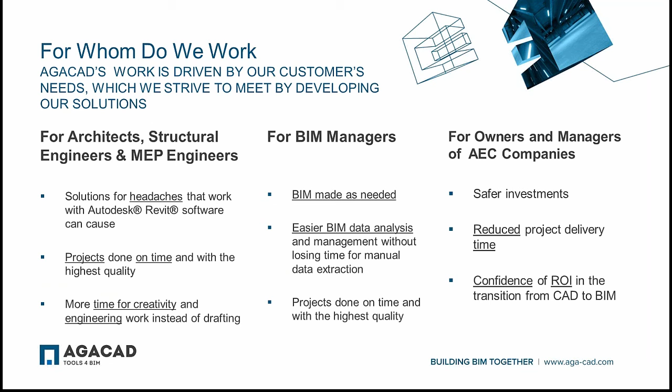These are the benefits we strive to deliver to our customers: less stress in daily work, easier BIM, satisfaction with return on investment. Our tools are not only for architects, structural engineers, and MEP engineers, but can also fit BIM managers, owners, and managers of AEC companies, and so on.

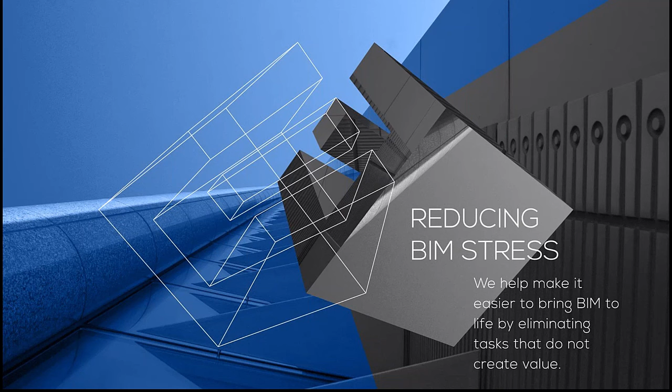Our promise to our customers is reducing BIM stress. We help to eliminate tasks that do not create value. The Tools for Revit extensions and BIM solutions significantly extend the capabilities of Revit, help to avoid many headaches, and save time. How do we save time?

We are creating additional software for Revit. Here you can find a bucket of our tools that can fit your needs. Going from the Cut Opening tool, which can create openings around line-based MEP objects where they meet walls, floors, roofs, ceilings, and structural elements, to other Tools for Revit add-ons, just for quicker, more intelligent work.

Going further with Smart Assemblies, Metal Framing, and Wood Framing, which are for structural engineers. We also have the Smart Browser for browsing your family libraries, for managing and making them smarter, not going into each family individually but creating batch changes for all families. We also have Sustainable Design, which can help you calculate energy things like heating power, cooling power, energy per month, and energy per year.

We also have BIM Tree Manager, one of our powerful solutions that can do a lot for managing your projects. And we have MEP engineering solutions like Smart Hangers for distribution of hangers and supports, R-Heating for creating heating systems, and Smart Diffusers for ventilation systems.

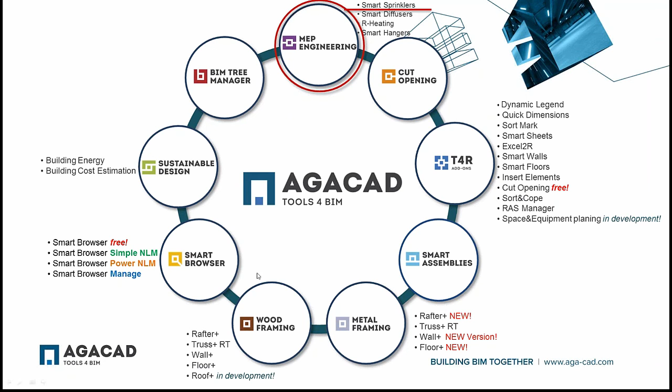Today we will speak about Smart Sprinklers, the solution that can distribute sprinkler heads into your project, connect them into one system using additional routing configurations, and size the pipes according to your needs. I don't want to speak more about this—I just want to go to my Revit and start showing what we can do with Smart Sprinklers.

At the very beginning, I want to mention that I'll try to show you everything on a new Revit project, because I want you to know that our Smart Sprinklers could work with any type of information that is in Revit. I don't need to prepare somehow for my presentation or my project—I just have to open my mechanical template and work on it.

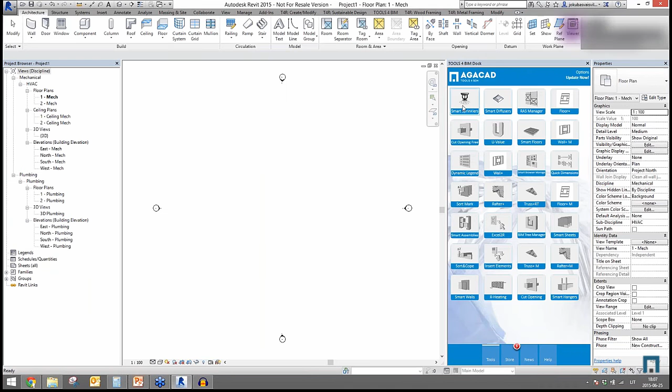So I just opened my mechanical template, and here you can see our smart sprinkler solution. This is a very powerful solution that has three different features: virtual grid, distribution configuration, and insertion of sprinklers. At the very beginning, I want to mention that our smart sprinklers could automatically distribute elements, specifically sprinkler heads.

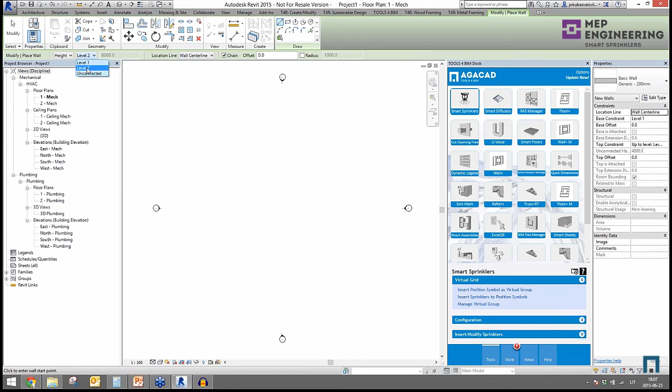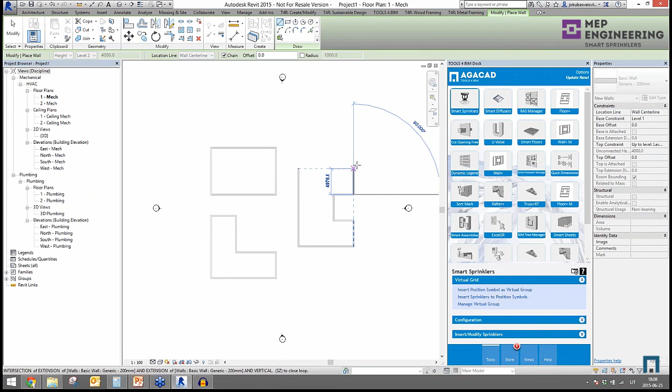For example, if we have such a space, or something like this, or even something like this, our smart sprinklers could handle that. Even if you have odd shapes inside your building, our smart sprinklers could help you distribute your sprinkler heads into the project.

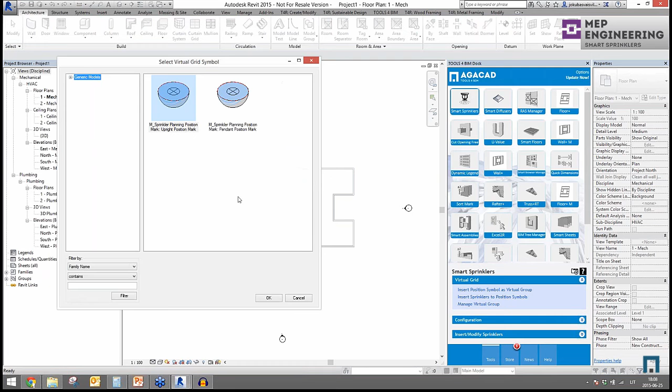At the very beginning, I will distribute my position symbols as a virtual group, just to create connectivity between a space and a sprinkler head. Here you can find sprinkler planning position marks for pendant and upright sprinklers. I will use the pendant position mark, for example, and as you can see, the X and Y axis occurs on my space.

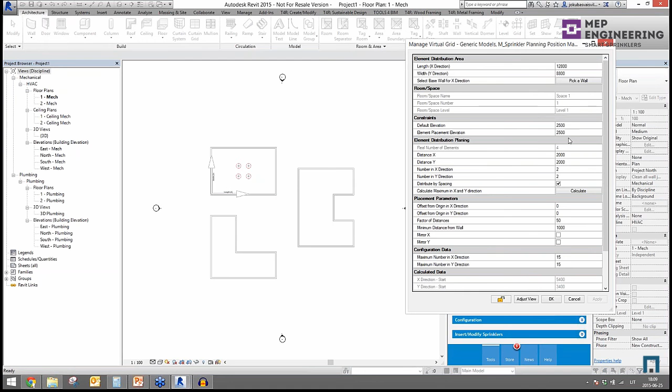Anytime I can change the X and Y axes to fit my needs, because according to these two arrows, you will be able to distribute your elements in your project. Here you have to define the elevation of placement of elements, as well as the distance between two elements.

So what does it mean? If I have sprinklers and I know that the coverage area of each sprinkler is 2 meters, for example, in my case, I can calculate that, and the solution automatically calculates the number of elements in the X direction and the Y direction.

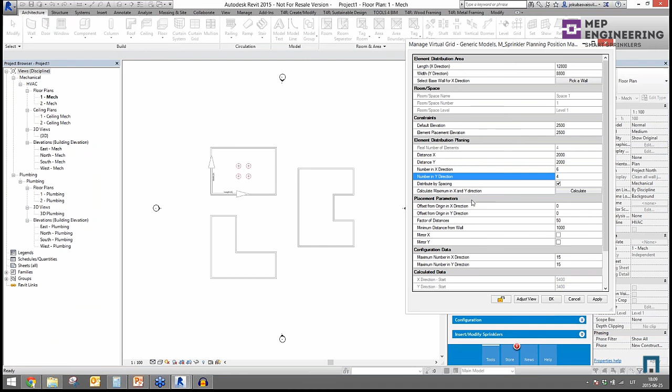After this, I can apply that to my project, and you will see how cool it is looking here.

As well, we have the offset functionalities. We have the functionality to set the minimum distance from the wall, for example, like this. I can set the maximum number of elements on X or Y directions like this, and they automatically just disappear.

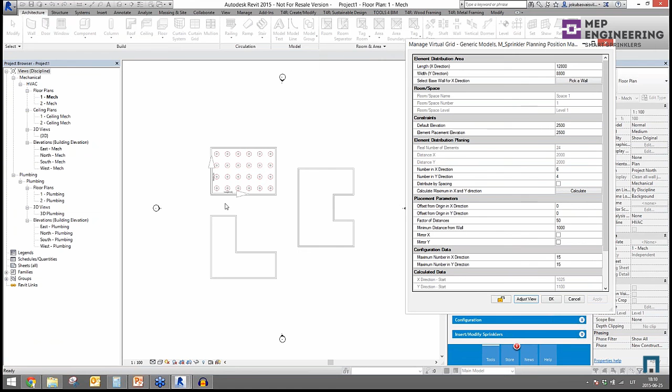Okay, I'm going back, so I'm applying. I can distribute sprinklers like this, so we will have a little bit bigger distances between the elements.

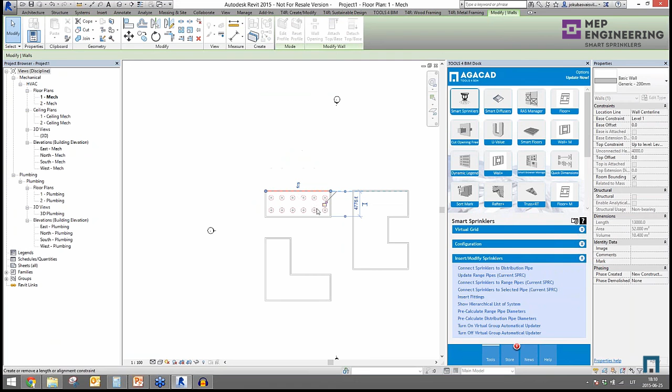But if I try to move my walls, for example, if the architect does some changes to our model, our sprinkler heads will move together. So you can see, if I'm changing the shape of my premise, of my space, the sprinkler heads automatically reduce or increase the distances between them.

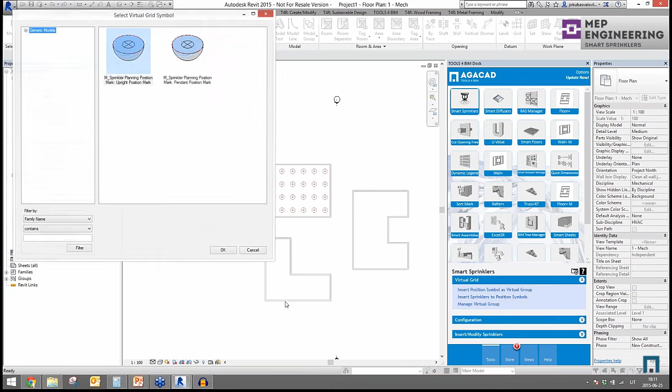So why did I do such spaces with such geometries? I just wanted to show you how our smart sprinklers could work with such geometries of spaces.

Out of the space. Oh, come on. Okay, let's check this one. Okay, yeah, that's what we need.

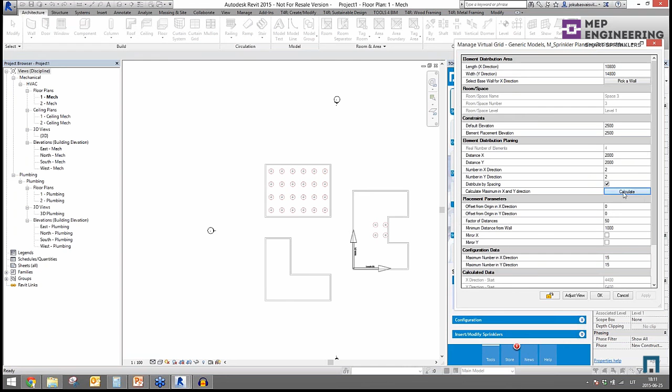So what I am doing is calculating the number of elements in the X and Y directions. I'm applying that, and you can see that the solution is reading the real area of a space, and it is distributing our families like this.

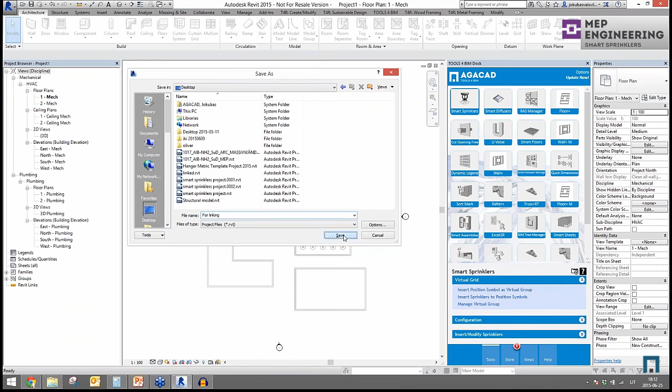So I want to mention that our smart sprinklers could work with linked files as well. For example, I will try to save this on a desktop as a file for linking, and I will turn that off, and open, for example, a new mechanical template.

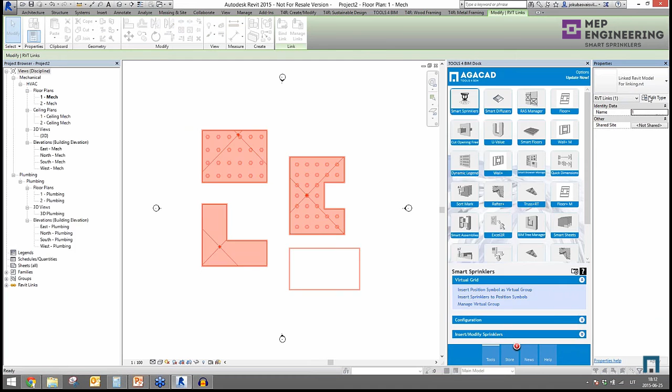And I will try to link the Revit file for linking. I'm opening it, and I have a link over there. So what I should do is create my links to be room bounding. I click OK, and I have to place a space over here.

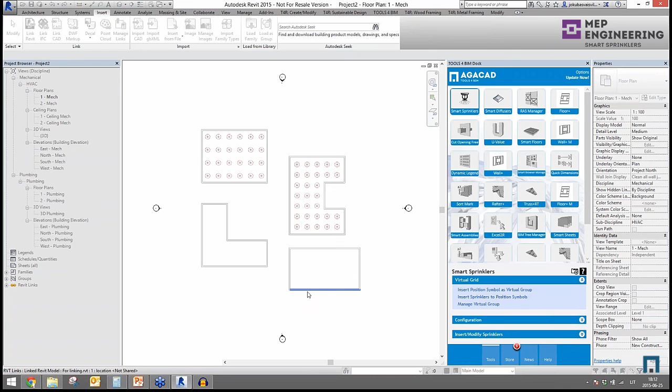Using smart sprinklers, I will take a space from that premise, and I will click the escape button. As well, I will take the x-axis, this wall as an x-axis, and again, now I'm able to do the distribution of my sprinkler heads.

So this is brilliant, really. Okay, so if I turn on the virtual group updater, and I will save this.

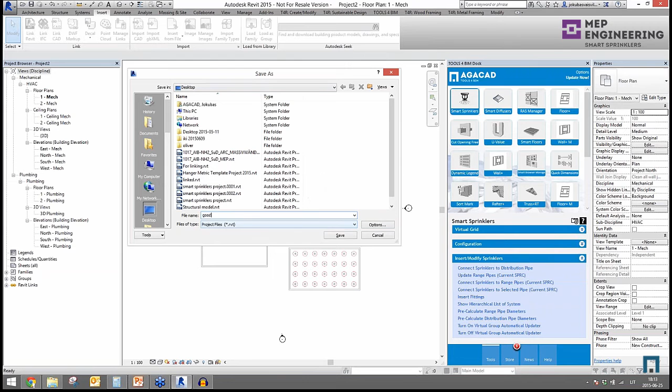Linked file. I'm saving it, and again, if the architect will do something with our space, with our boundaries, if I move it like this, I will save.

Oh okay, no save, get back to that project linked file. And you will see how automatically your sprinklers are updated after the update of the architectural model.

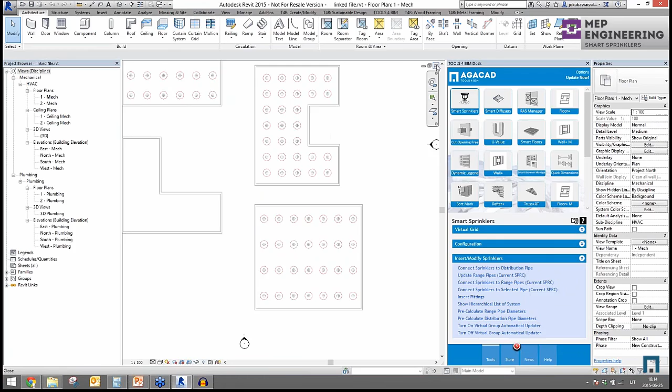So this is a really nice feature. I'm going back to the file that we have over here, and I will try to distribute these position symbols again over there. Just simply pendant sprinklers, calculate, apply, and that is all.

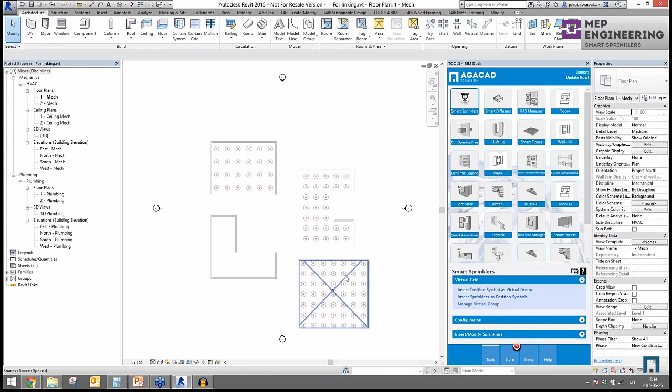And I want to distribute here the position symbols not only for pendant sprinklers but as well for upright, for example. So now I can change something for elevations.

I can calculate again the same, and you can see that the position symbols are in the same places as the position symbols of pendant sprinklers. So I will just try to move them to one of these sides.

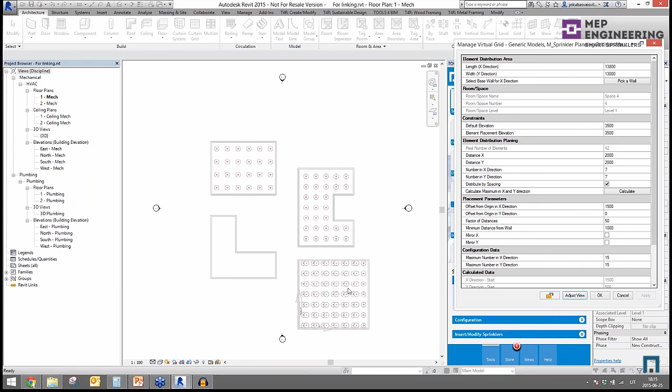Okay, for example, like this. So I'm clicking OK, and you can see that one of these, the position mark for pendant sprinkler, is over here, and the second one, the position mark for upright sprinkler, is here. So using just a simple insert sprinklers to position symbols feature, I can distribute my sprinkler heads on each of these position marks.

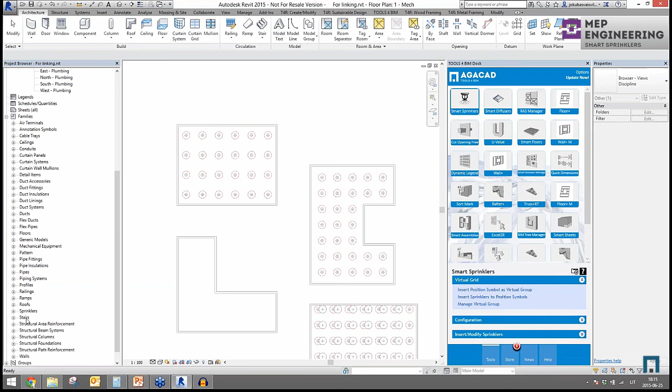So I have prepared two families, really simple Revit families. We can check them. Sprinklers, yeah. So I have a simple family, and you can check this is point-based Revit family with the connection, and that is all, nothing special. So you can work with your families.

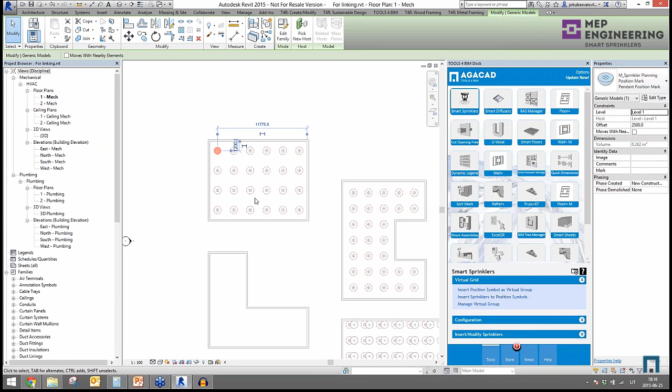It doesn't matter what kind of families you will use here. Just you have to think about hosting the families, and if you do not have where to host the families, so you should think a little bit about these families.

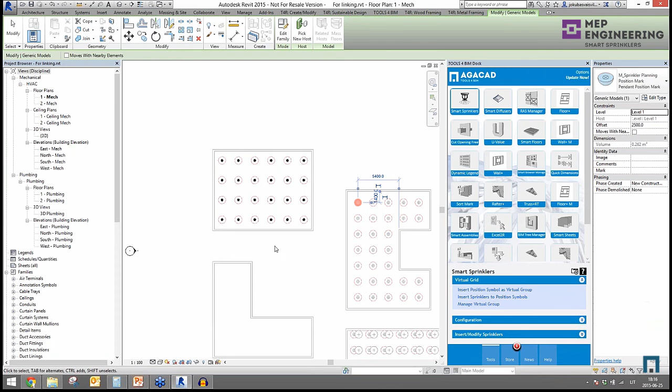So I'm taking one of these bubbles, and I'm going to insert sprinklers to position symbol. So I'm taking pendant, and as you can see, in just a second I distributed my real sprinklers into my project over there as well. If I need here, insert position symbol—sorry, insert the real sprinkler. Here is a pendant one. I distributed pendants, and I will take this and try to distribute upright ones.

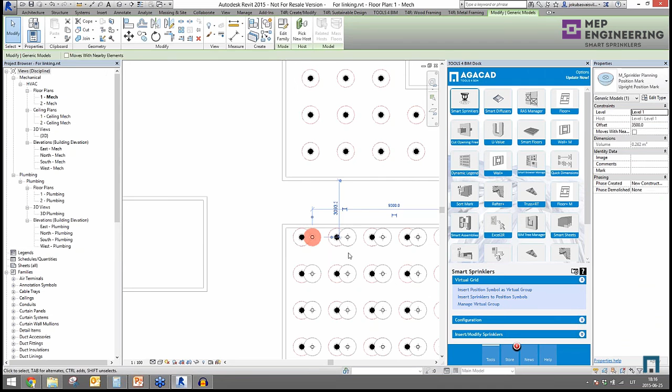Okay, so everything is done. Anytime you need to do some configurations, you can manage the virtual group. It doesn't matter when—you can calculate the number of elements, and you can say that I need one by one, calculate, apply that, and you will have all the sprinklers just distributed again.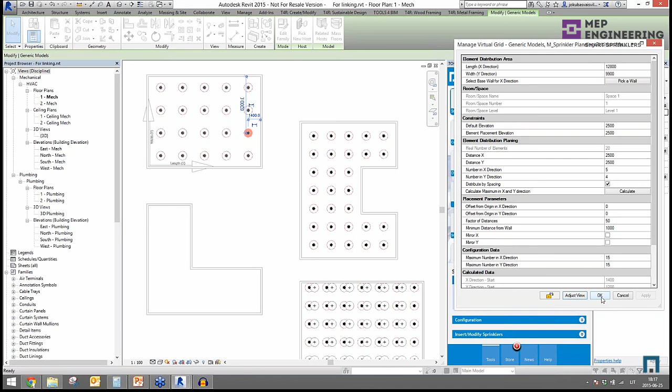So this solution is really flexible, and you can work with it very easily. So after this, if you want to connect your sprinklers to one pipe, for example, passing like this, you have to create your own pipes.

For example, where is the pipe? The pipe. So I will just duplicate these pipes. I will change the names, for example. So this will be sprinkler pipe. This will be range pipe. This will be, for example, distribution pipe.

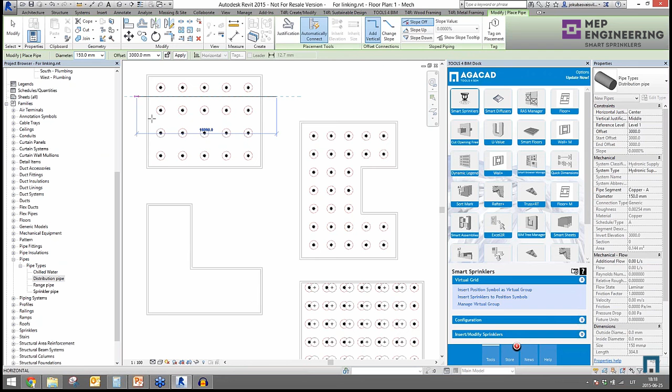So I will just take the distribution pipe and I will draw it at 3 meters height, for example, right here. So I will do the fine view over there. So what I'm going to do here, I'm going to connect all the sprinkler heads to this pipe.

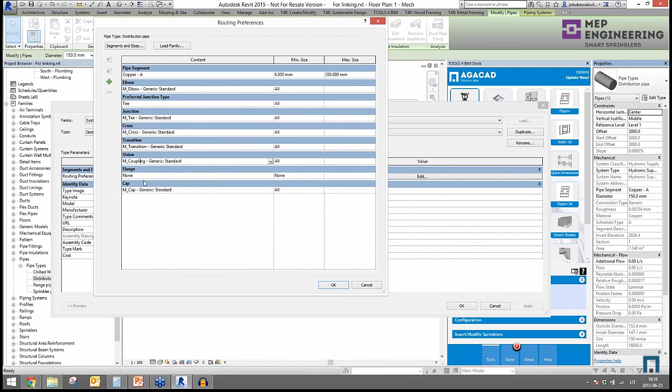But at the very beginning, I should check the routing preferences inside of this pipe. I should check all these elbows, tees, junctions, crosses, transitions, unions, and caps. After this, I should go inside of the configurations of our smart sprinkler solution, and you will see several things here.

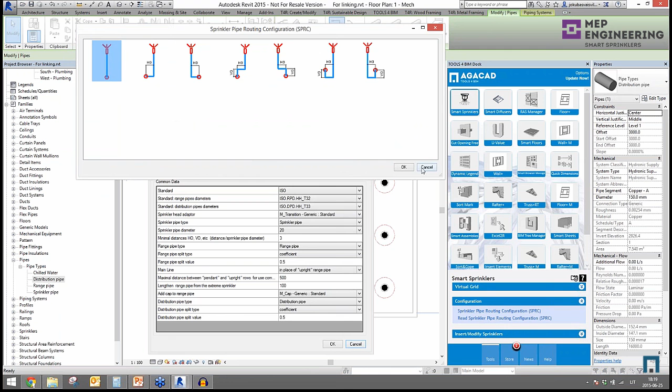You will be able to choose the upright and the pendant sprinkler connections from the most popular connections all over the world. So we have the straight connection, horizontal offset and the straight connection, horizontal offset to the left side, and the connection to the sprinkler, and so on. So we have the most popular connections that are available in the market.

So you can do the same for pendant and for upright sprinklers. You can set the elevation of your range pipe here and here. As well, you are able to define the horizontal offset and the vertical offsets of your sprinkler connection.

So if I go further, I will get some additional information about the sprinkler head adapter, so how the sprinkler should be connected to the first pipe. So our smart sprinkler solution is taking the families from your families that are loaded into your project, and you can choose wherever you want.

So I have a sprinkler pipe type, so I will choose sprinkler pipe type. I have the range pipe here, I will choose the range pipe. As well, I have distribution pipe, so again I will take the distribution pipe here. I have to define what kind of cap I will use in my project. As well, I have to define some kind of coefficients and so on.

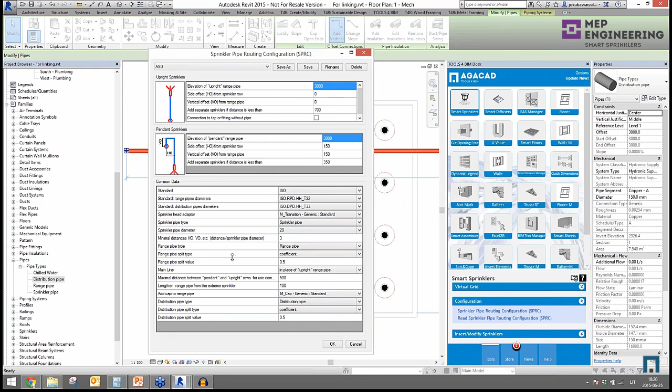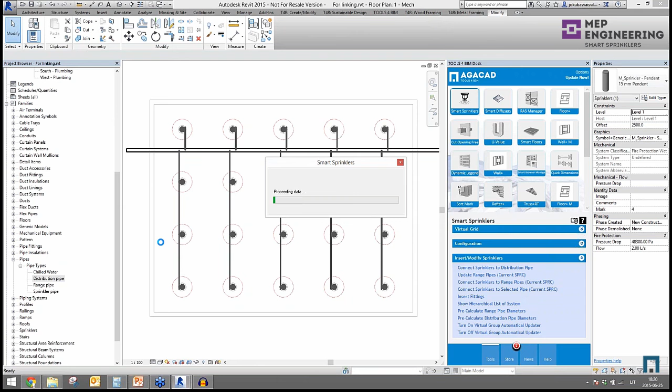So after this is set, I can use the functionality to connect sprinklers to distribution pipe. I should say what sprinkler goes to what pipe, and it automatically routes everything. It automatically inserts the fittings, inserts the caps, inserts all the transitions that you need, and so on.

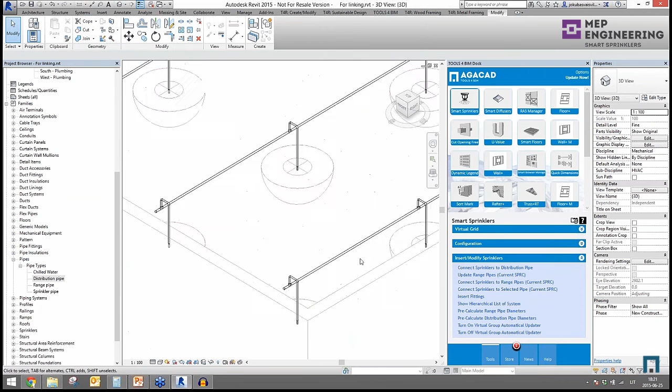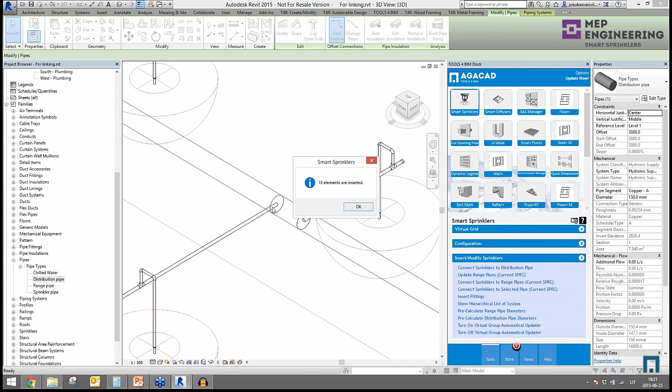Everything is connected like this, just one place is missed, so we missed inserting the fittings, but we have created the functionality to insert those fittings. So after I click insert fittings, it will split my pipe, find the intersections here, and it will insert the families that you need.

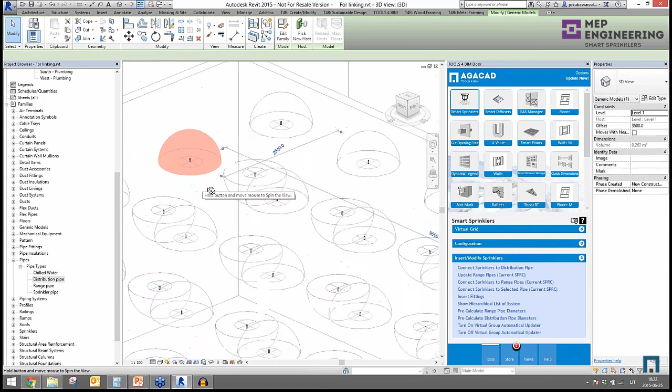I like this feature very much. If you have sprinklers for the pendant and upright sprinklers, you can combine these things. Going back to the plan view, I'll draw the distribution pipe like this. Imagine this is the distribution line passing through one of the premises of your building, and you can see I have two sprinklers over there.

I have the configurations for pipe routing, and I can choose the main line. How should I connect the sprinkler head? I have three different possibilities to use separate range pipes. I can place the main pipe in place of the upright range pipe, or in place of the pendant range pipe. Let's choose one of these.

You can see I have different standards, and I can choose from these: NFPA standard, ISO standard, Australian standard. The standard stands for pre-calculation of the diameter of the pipes.

But how is it calculating? I'll show you fast. It's taking the information from a text file, and here you can see if I connect one sprinkler, I'll use 25 diameter. If I connect two sprinklers in a row, I'll use 32 diameter, and so on. So how is it working? I'll use my paint tool.

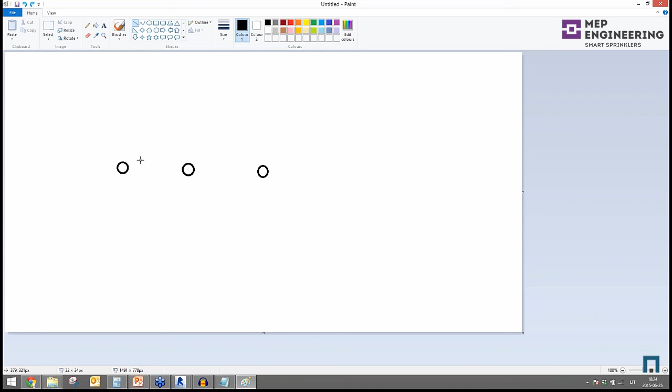If I have one sprinkler, two sprinklers, three sprinklers, four sprinklers, for example. If I have the very first sprinkler, I'll use such diameter. If I have two sprinklers connected to the line, I'll use the bigger diameter. And if I have three sprinklers, I'll use the biggest one. So that's how it's sizing - you're writing the rules inside here. For example, if I have 9 sprinklers, I'll use such diameter, if 6, such diameter, and so on. The same is here in our solution.

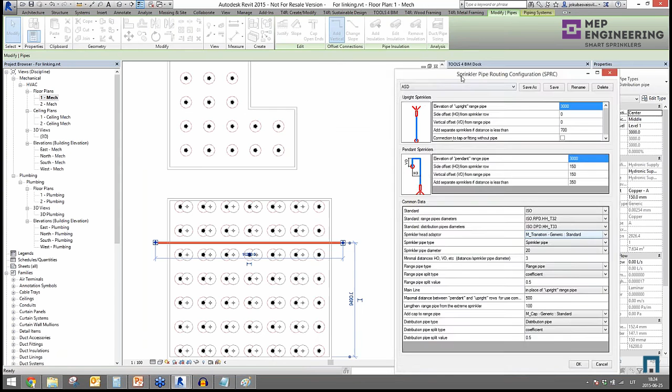You can create your own text file and insert it here for range pipes and distribution pipes, and our solution will automatically size your pipes. If you have a size change, it will split the pipe and insert a transition in between them - right in the middle of the two. You can choose the distance or the coefficient: 0.5 means just in the very middle between two sprinklers.

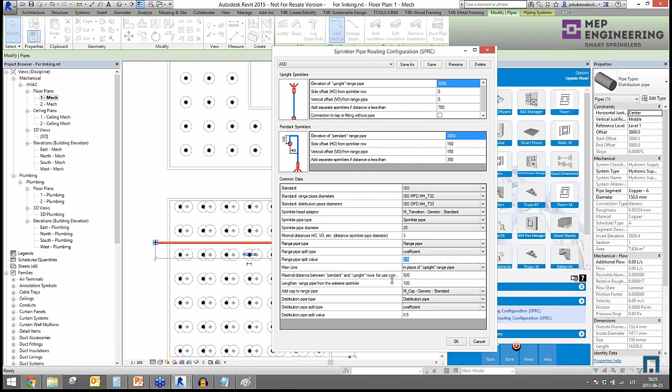After this is set, I'm going to connect the sprinklers to the distribution pipe. I have selected the pipe, and now I'll select the sprinklers. As you can see, it's creating the lines easily and distributing the pipes to our sprinkler heads.

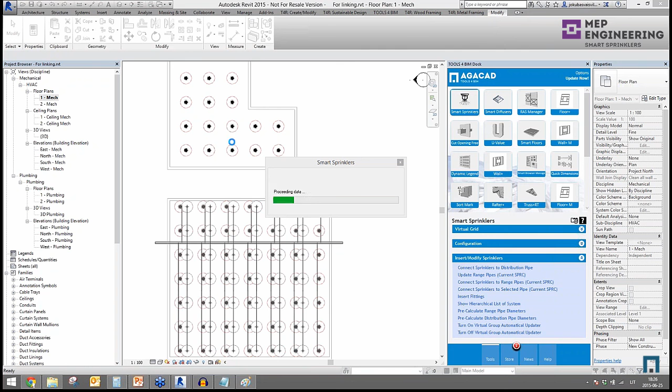We have a question - Robert is asking, does the solution support imperial units as well as metric units? Yes, of course, thanks for the question. We have a lot of different visitors today in this session, so I'm just showing everything in metric, but we also have imperial projects. Even on the help page, you'll see we have metric and imperial sample projects. So everything is working like this.

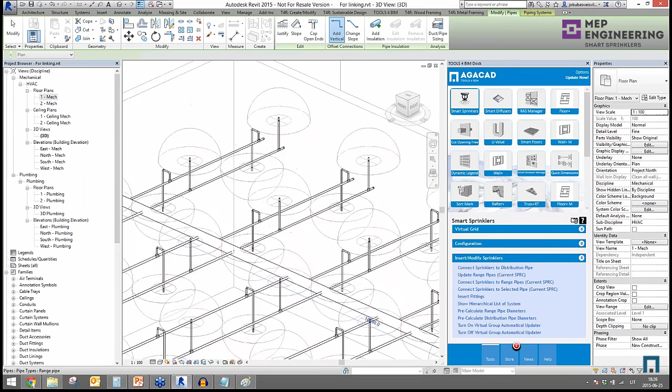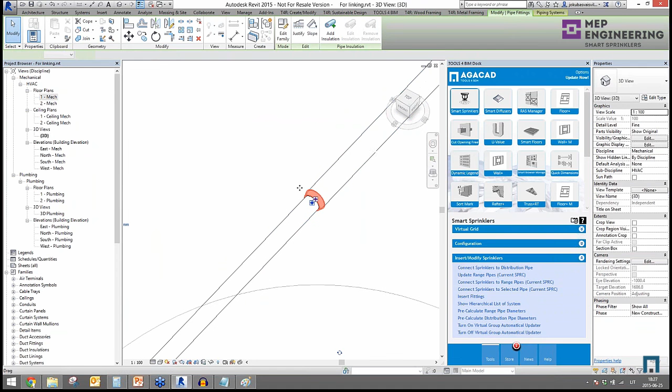As you can see, we have distributed all our pipelines easily like this. As I told you, if we have a change of diameter, it automatically inserts a transition inside the system. I set the transition to be just in the middle of these two sprinkler heads, so it is over there.

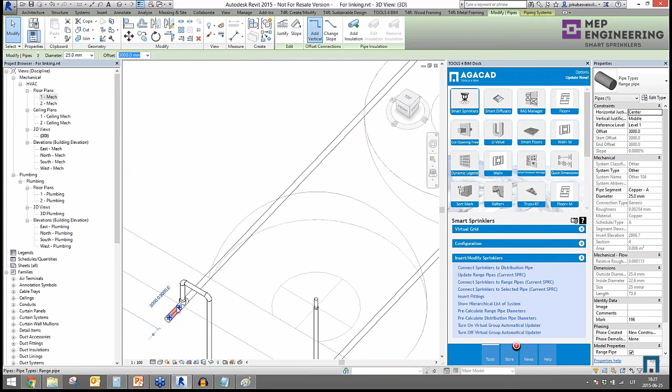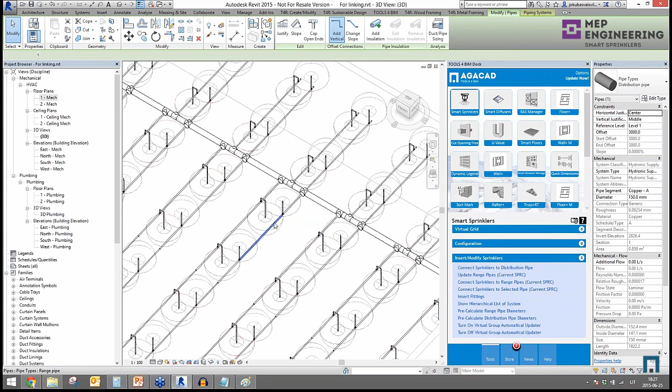I can set the cap, how our pipe will be capped. I can also identify the length of this pipe - a lot of different stuff. Let's try to insert the fittings over there. Hope it will be possible, because of the sizes, as you can see. Yes, it's possible. So we inserted the fittings, and as you can see, the pipe everywhere is the same size.

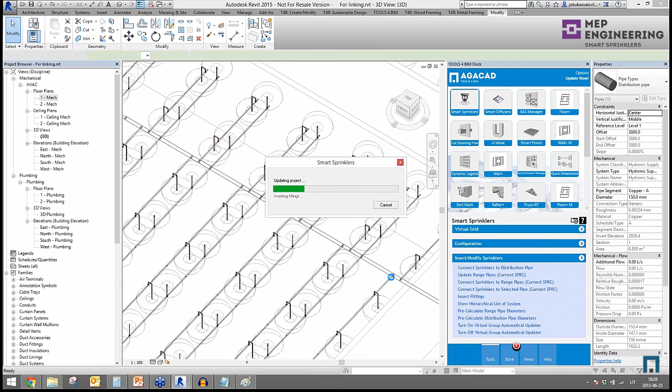So what I'm going to do is pre-calculate the distribution pipe diameter from this point. As you can see, it's calculating the number of elements in a row, how many elements are connected to such a point, and it's inserting new fittings, sizing everything and so on. As you can see, we have one size change, a second size change, and that's all. This is brilliant, very nice.

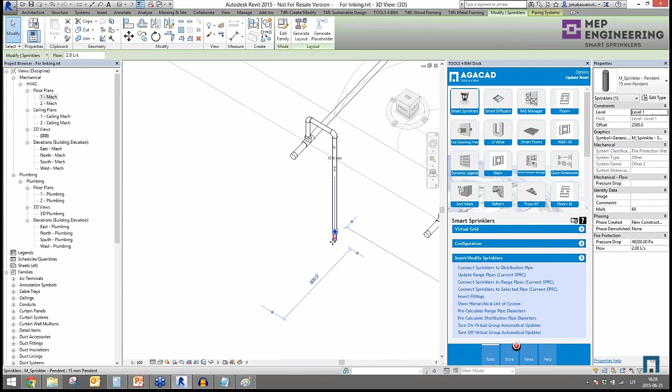So anytime you need to, for example, copy sprinkler heads and distribute them somewhere here, you'll be able to connect sprinklers to the range pipe or to any selected pipe like this. I am selecting it and connecting sprinklers to the range pipe. It's really nice and really easy.

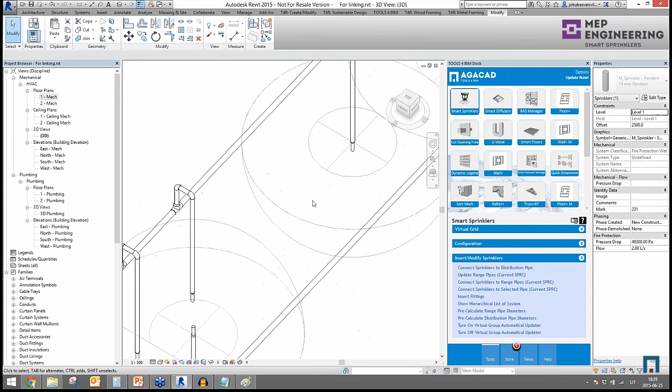That is kind of everything I wanted to show you today.